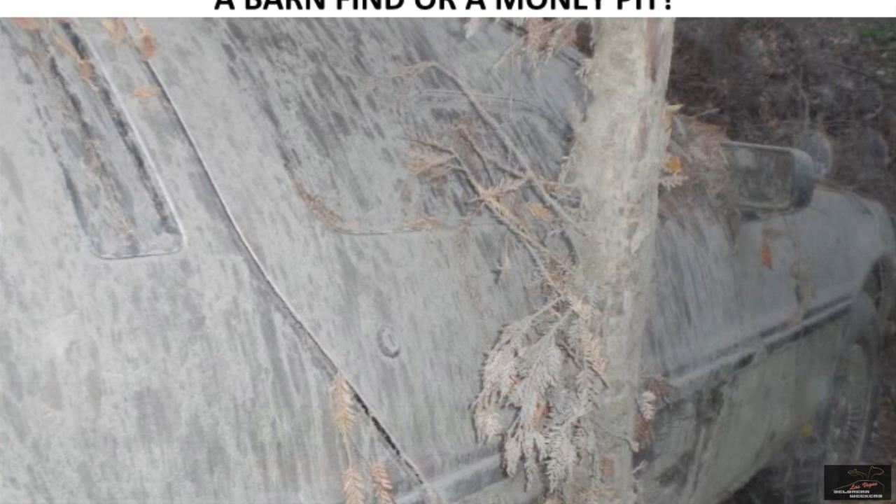So where did this start? Everybody dreams of a barn find, or what I call a money pit. This is a DeLorean that was out in the woods with a tree growing next to it, covered with a lot of dirt and dust and debris. I've restored 3 cars like this, and you learn a lot. They're a challenge, but as our Las Vegas DeLorean Wreckers people said, we're going to buy DeLoreans that no one would bother restoring and then make them into real cars again, and we've done that and made some very, very nice DeLoreans.

So, early on, when the cars first came out of the factory, what were the first things that failed? There was a number of items. There was an initial recall for loose bolts on the front sway bars. There was the alternators that failed. There was broken muffler brackets, loose trailing arm bolts, power window motors failed, and of course, the illustrious plastic clutch line failure. So what did this look like?

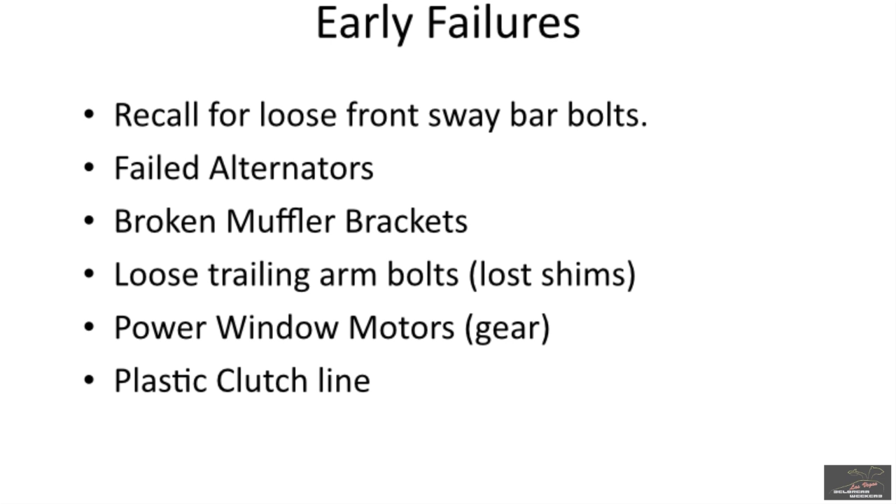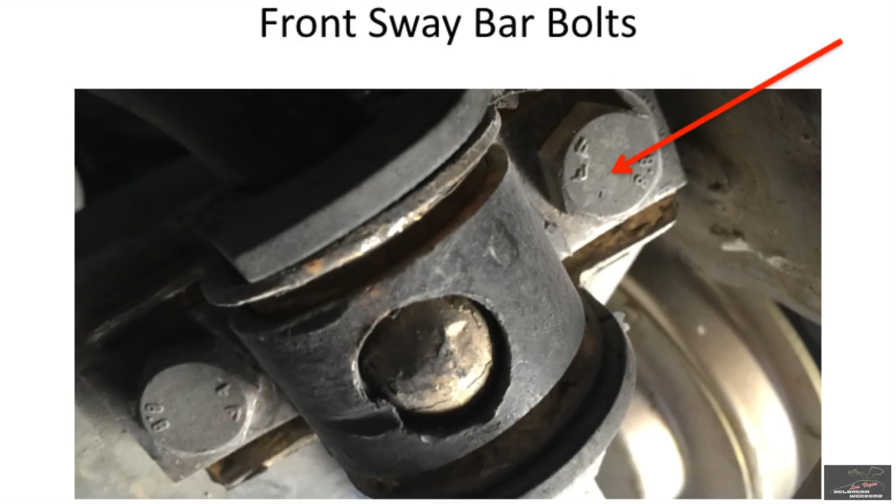This is a picture of the sway bar bolts. This car does not have the factory recall on it. The factory recall was simply a bunch of tabs that they put below this bolt and bent the tabs up so the bolt wouldn't come loose. So if you don't see tabs holding your bolt on, you probably didn't get the factory recall. Does it really make a lot of difference? No, just make sure your bolts are tight. And on every car I've tightened them up, I've never had them come loose again.

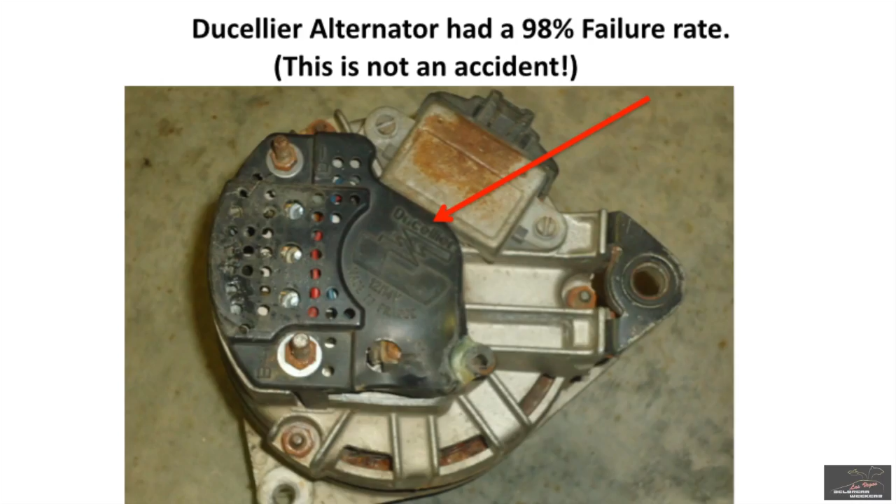This, of course, is the infamous Ducellier alternator that had a 98% failure rate. That's not an accident. Failure rates on alternators are less than 1 in 1,000, and on new ones they're close to less than 1 in a million. The fact that it had a 98% failure rate means they basically sold him junk. And of course, DeLorean did not pay for these. Here's another shot of the Ducellier alternators.

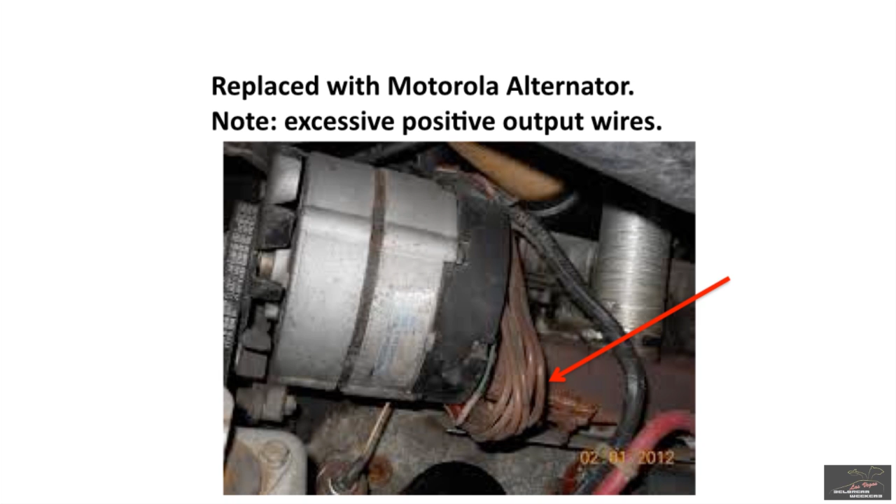So what did people do early on? At least from the factory, they started putting in Motorola alternators. But one of the things that bothered me about the design was these brown power wires from the alternators. This is unusual—why did DeLorean engineers run all these positive 12-volt wires to the different sections of the car? They just did this. It's sloppy, it's bad engineering, it's a waste of wiring. And the problem, and we'll talk about this later, this stuff starts to corrode. What I do on my cars is I basically replace this with a 6-gauge or 8-gauge wire to the fuse box, because the more wires you have, the more that's going to go wrong. So we got rid of that.

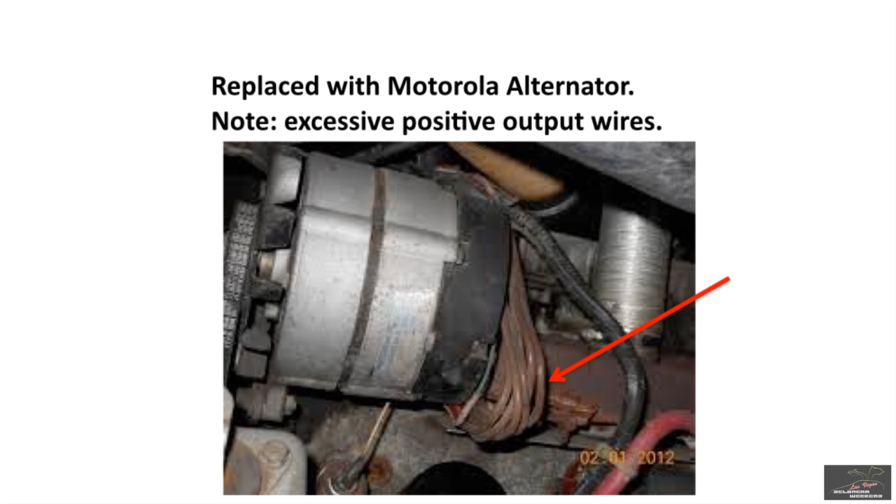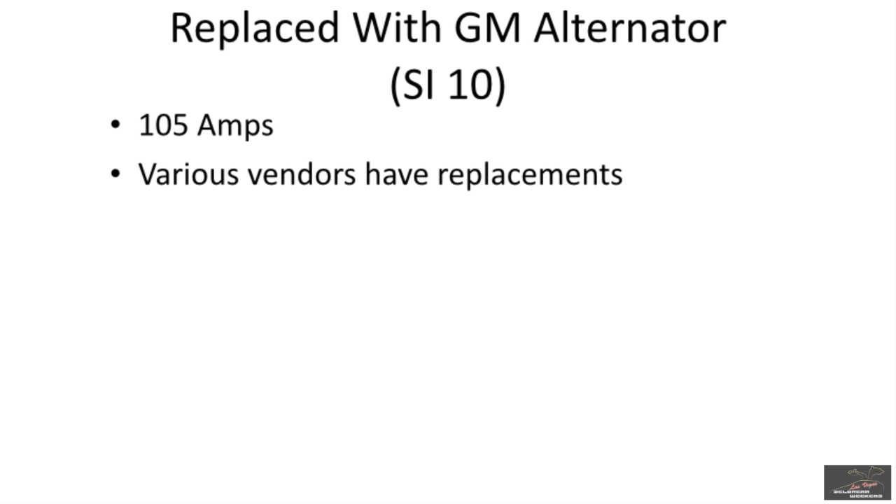What people typically do is they replace it with a 105 amp GM alternator today. It's an SI10 model rather than an SI12. So if you're going to do that, buy an alternator. You can get the really cheap ones on eBay, simply looking for an S10 or SI10, or you can go to the vendors and pay a little bit more. But in any case, just change the alternator. Most likely your car has had it replaced already. I think I have seen 1 car with an original Ducellier alternator on it.

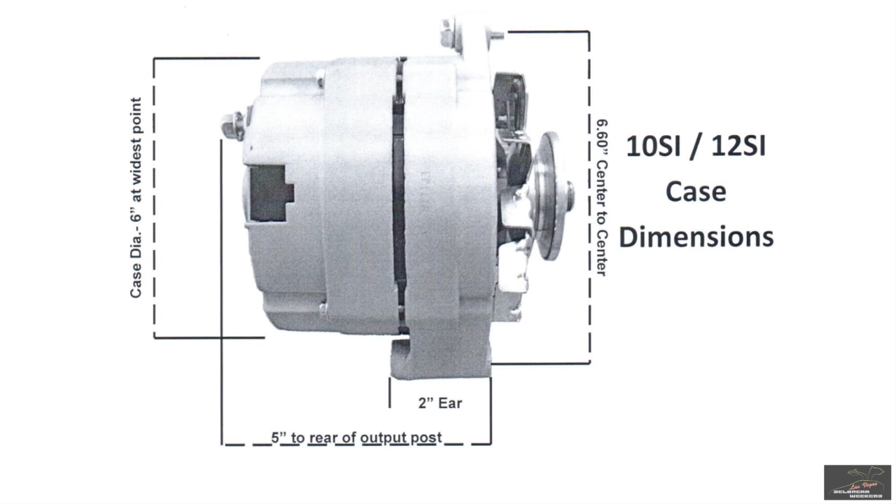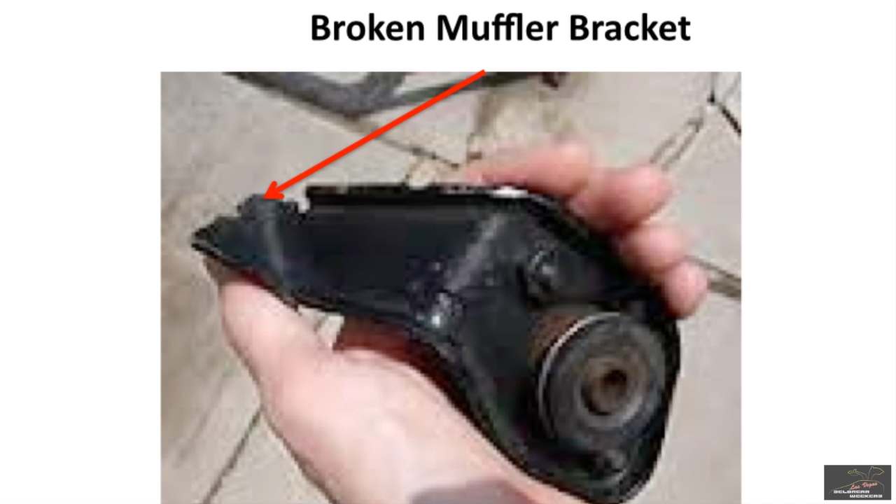And the next initial failure was the broken muffler brackets. They basically all cracked right at this particular point. It was a vibration issue, and if you re-welded them, they didn't break again. So that hints at a hardening problem when they were originally stamped, or there was stress put in from the original factory. But most of these have been fixed on everybody's cars. I haven't heard of a muffler bracket going bad again since the late 80s or early 90s. Here's another repair job on it.

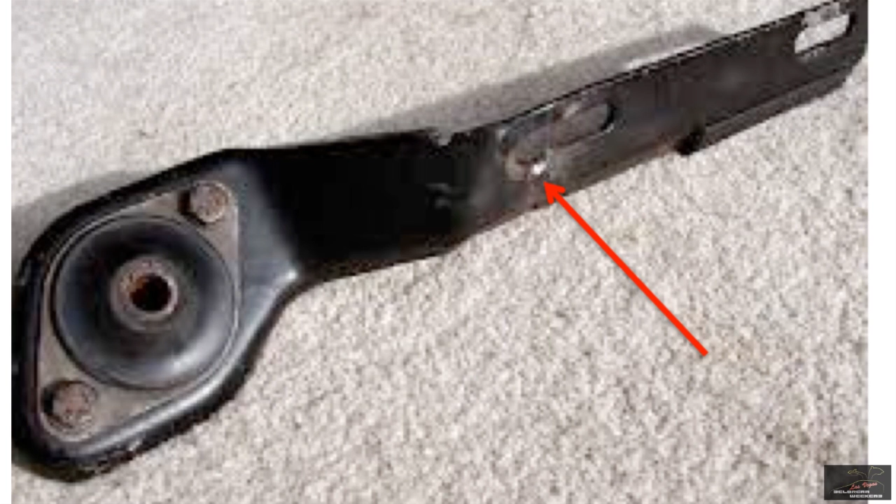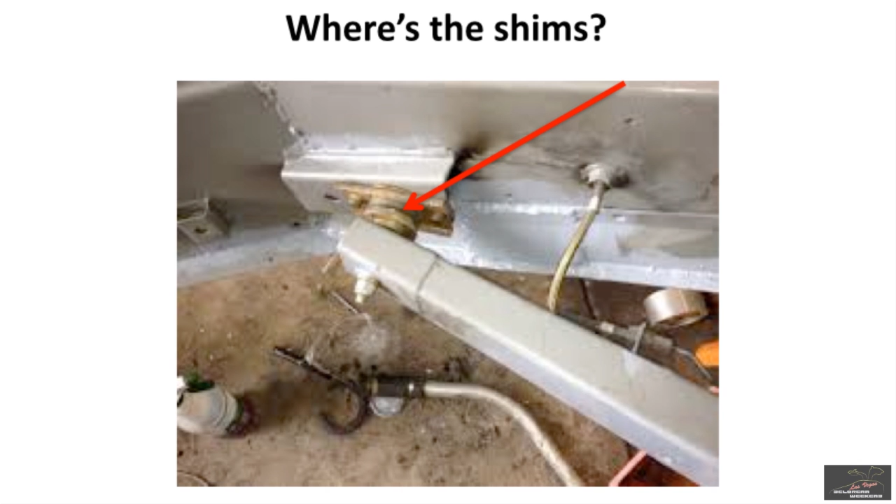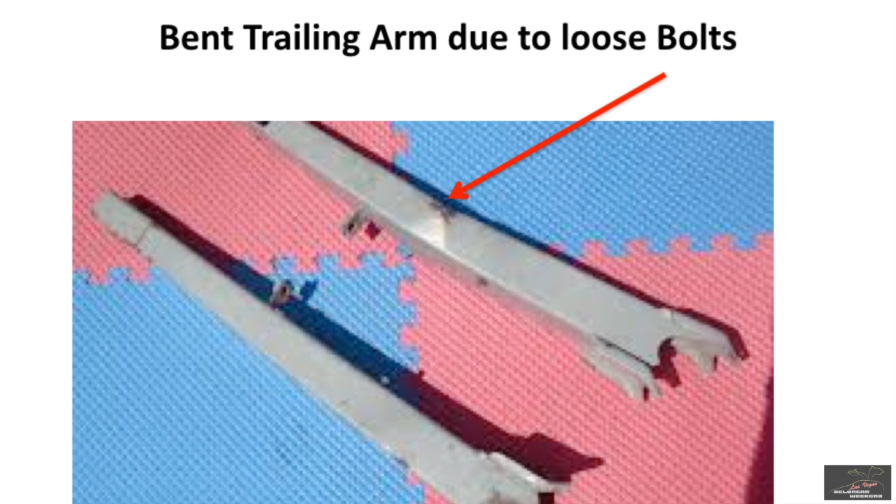If your trailing arm is bent like that, you have to replace it. So make sure your trailing arm bolts stay tight. Here's a typical trailing arm bolt. I said, oh, I'm going to fix my trailing arm. So you try to get your trailing arm bolt out and then go, it ain't coming out. Not without a big crowbar and a big hammer and lots of force. And this is what you'll find when you get them out. They actually bend quite easily.

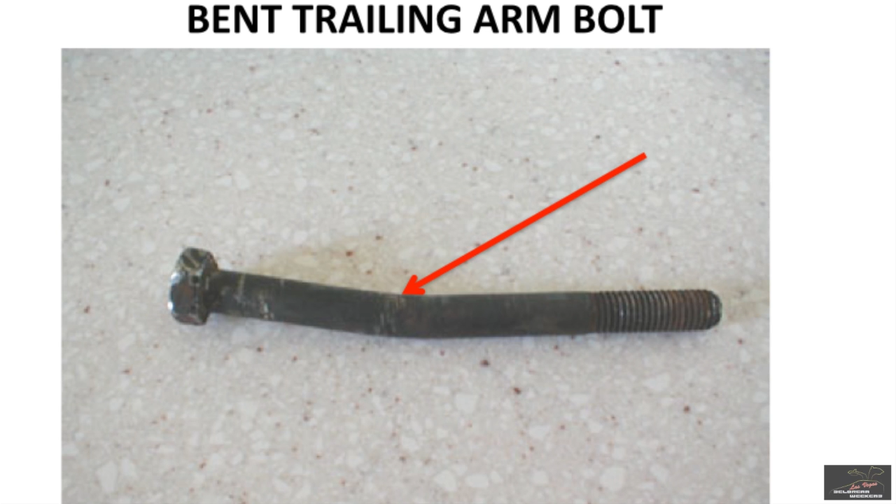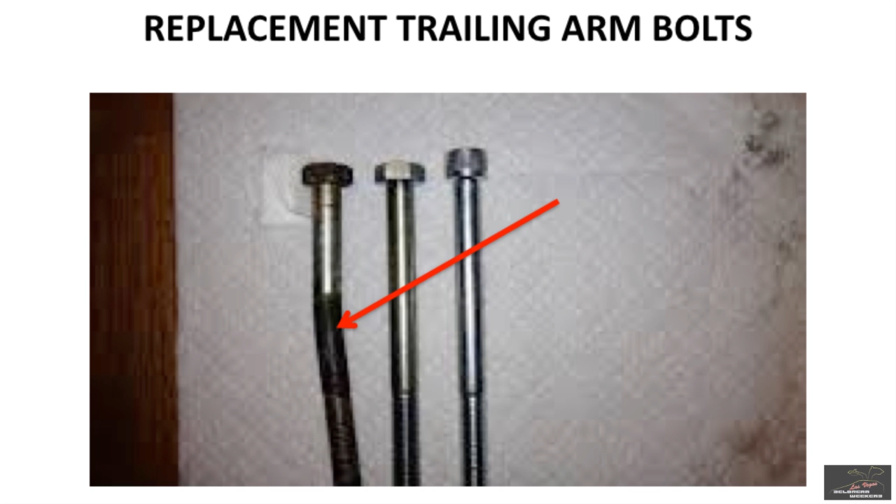Here's again another one. These are replacement trailing arm bolts that are hardened so they're less likely to bend. But if you're going to put in a high horsepower engine, you need to have trailing arm reinforcements put in, and there are a couple vendors who make that.

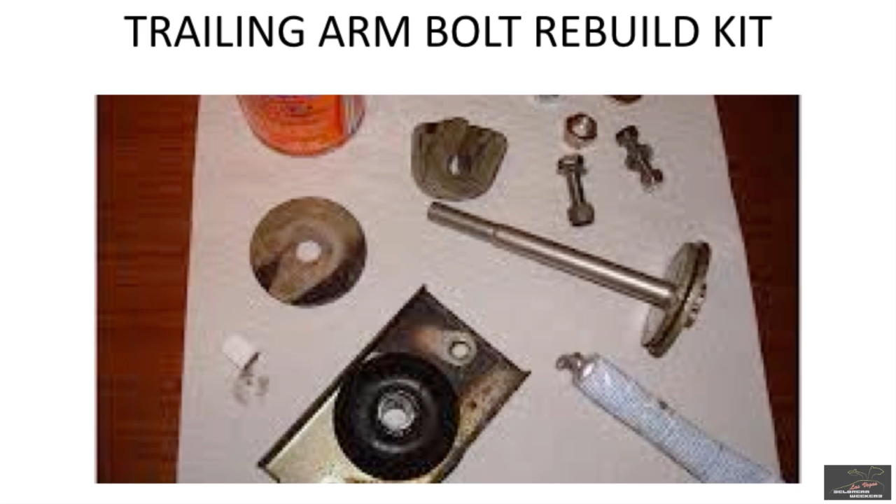This is a trailing arm rebuild kit. Problem I have with some of this stuff, these look like original 35-year-old parts. And these look like original 35-year-old parts. So 35-year-old rubber in a car may not be a good idea. Here's another kit where they give you the shims and the trailing arm bolts. So if you're going to deal with your trailing arm bolts, you may want to look at some newer parts. We'll show that a little bit later. But this is something you've got to really pay attention to.

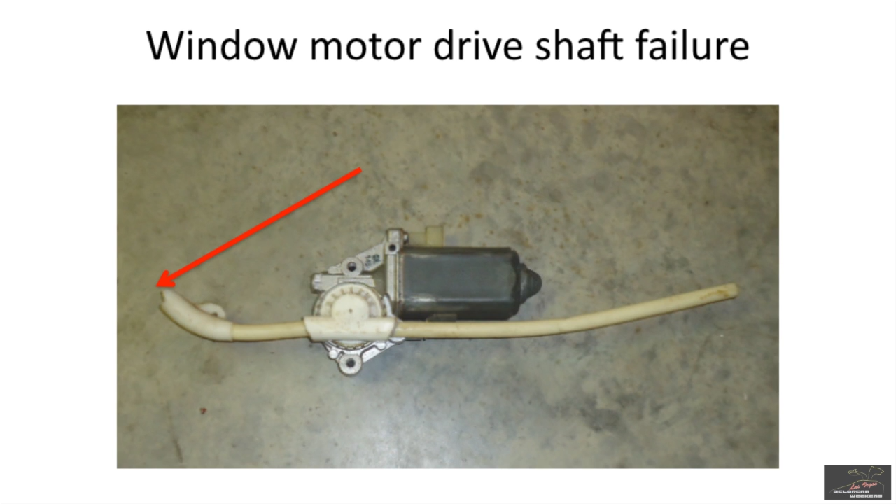And then another early failure was the window motor drive shaft failure. These were plastic and they would crack in this particular place. Mainly what happened is you would hit the end of travel on the window, causing stress in here because these designs did not have current limiters that would sense that the window was closed, and so this stuff would break. And then the other place it would bend is right in here.

And this is a close-up of it. See how skinny this groove is? And this is much larger, and what would happen, this would literally drive it out of the shaft and it would be flopping inside your door. So they came up with replacement ones.

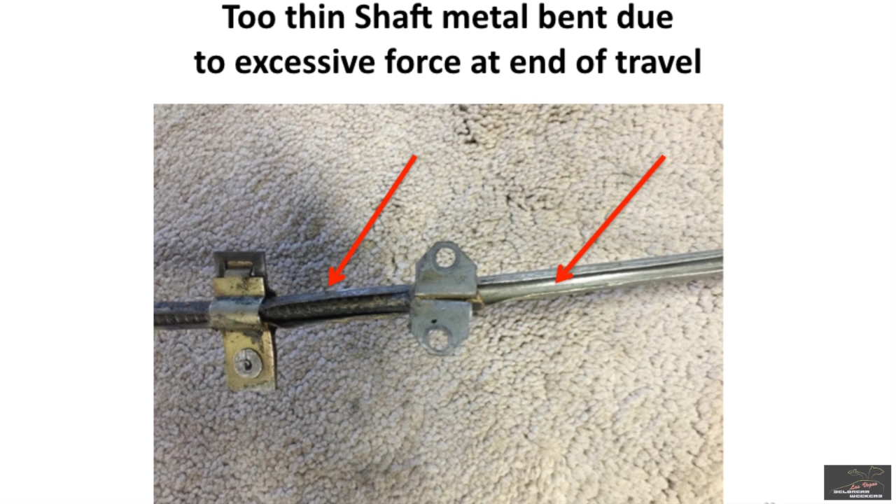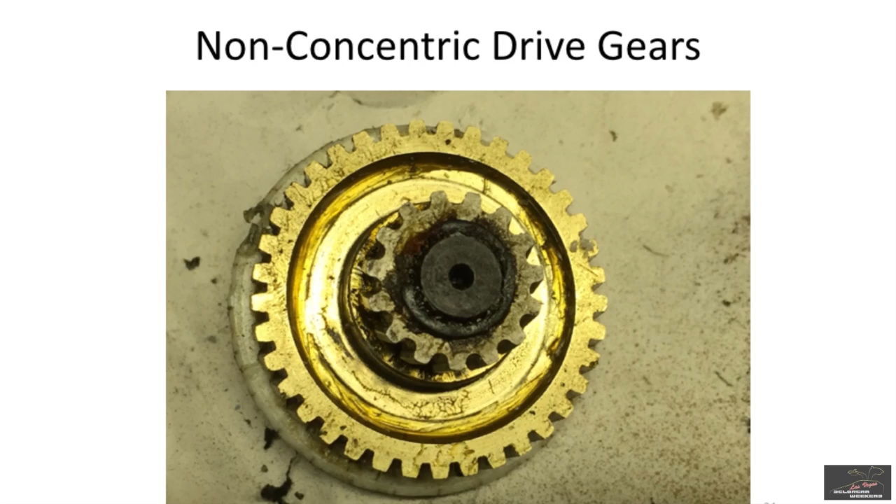The other thing that was wrong with these, this is where you get into the question of, did they sell them junk again? These are the non-concentric drive gears in window motors. And the motor would make a funny sound, and go, rrr, rrr, rrr. And the spacing on these gears was not even. How do you screw something like that up? But yeah, a lot of them were non-concentric drive gears.

They were defective. These are the aftermarket ones. They basically replaced the spring worm gear drive with a 3/8 inch diameter from a 5/16. And the big thing they did is this tube is much thicker metal now, so it can't actually be damaged by the motor driving the spring worm gear through it.

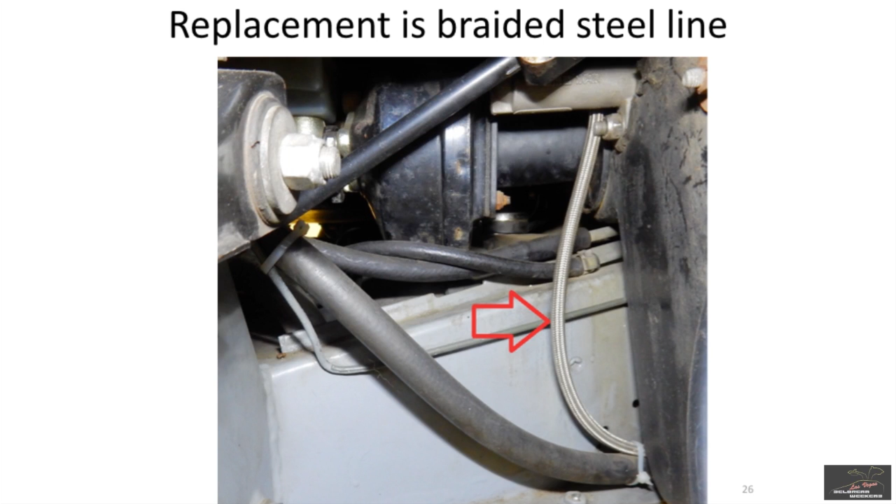And then of course the infamous plastic clutch hose. As soon as the car warmed up or on a hot day, this plastic tube would expand and you'd have no clutch pedal. And virtually all of them now have been replaced with a braided steel line. So if you see a braided steel line on your car, your plastic hose is long gone.

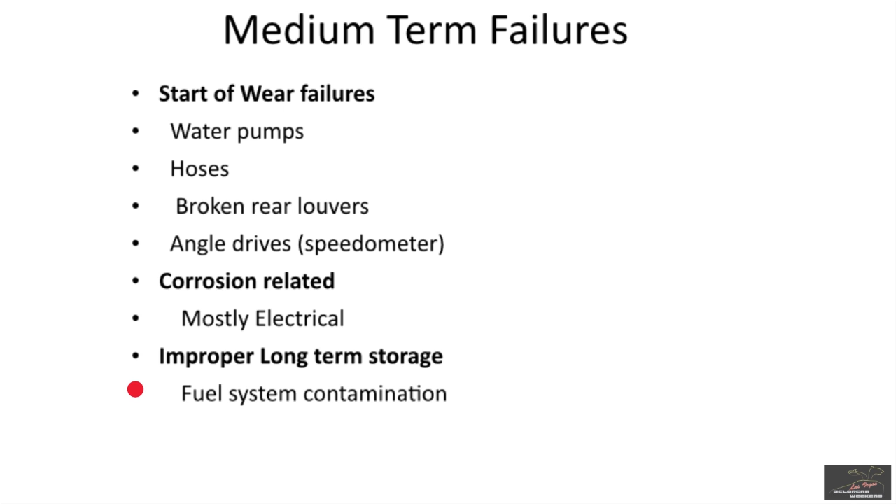And then we started getting medium-term failures. Water pumps would fail, hoses would come loose or crack, the rear louvers would break on them, the angle drives would fail and your speedometer would stop working, and then you started getting into the corrosion issues, and a lot of cars are experiencing problems with that right now. And then of course the people who don't drive their cars get into issues of fuel system contamination, and that's a very, very costly problem.

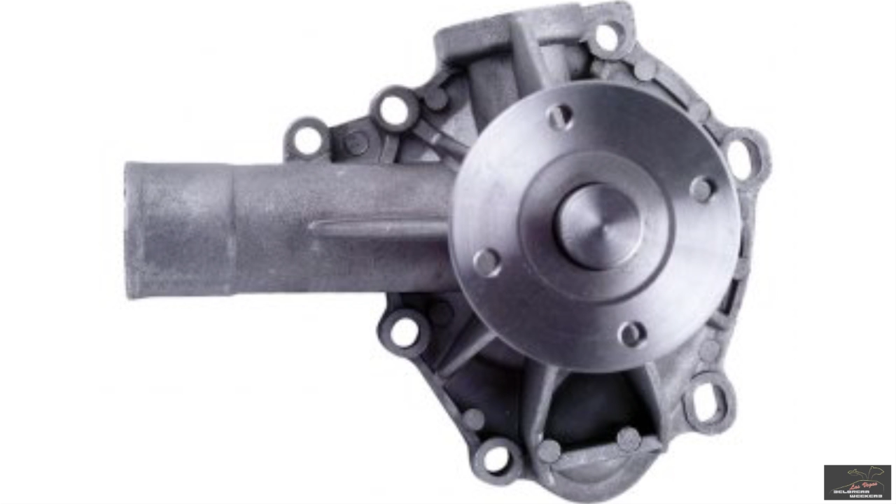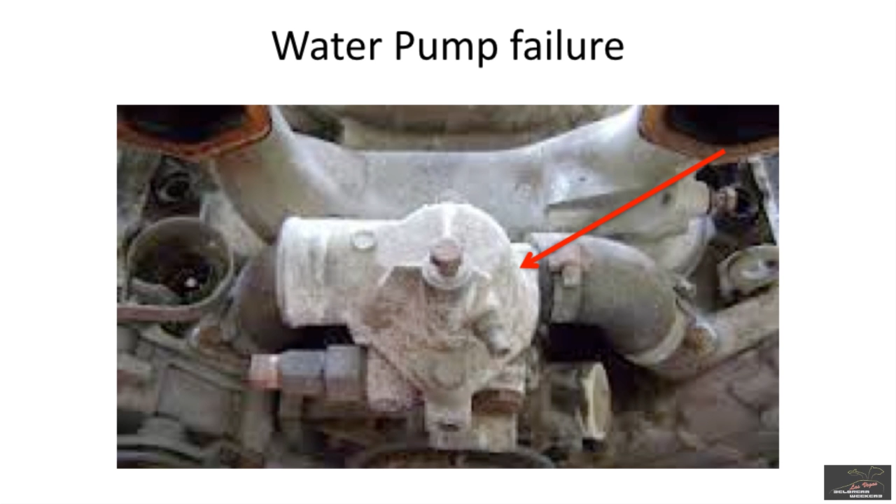The difference is that on the Volvos, the shaft is longer than on a DeLorean. But early on, this was the low-cost fix because you couldn't get DeLorean water pumps. Now you can, and most of the ones that failed have been replaced. They generally all failed around 30,000 miles, so the odds are your car probably has had its water pump replaced.

And then of course hoses, 35-year-old rubber. They now make them out of silicone rubber, which means they'll virtually last indefinitely. A silicone hose simply doesn't fail.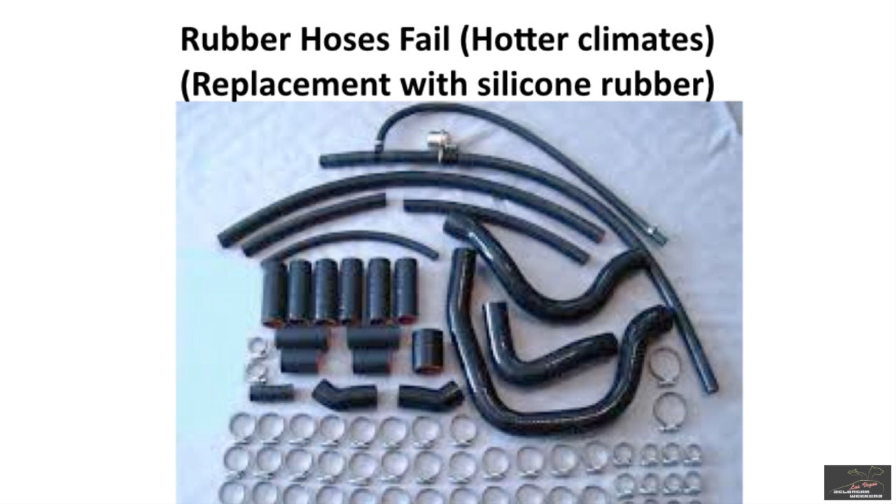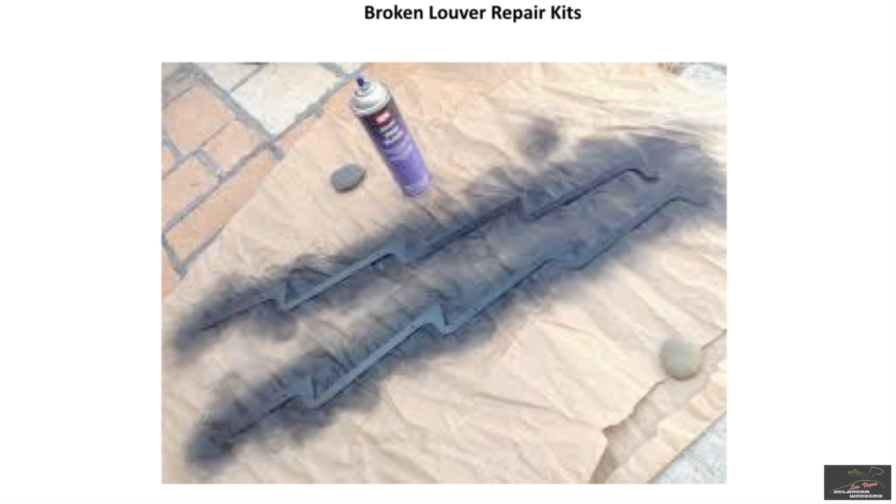And then of course the broken louvers. They sell repair kits that have bracing that goes down the center with little screws. You just bolt them on and it repairs the louvers. They made those a few years ago and they're still around, and they work. You actually end up with a better louver than came out of the factory, because it's not a question of if your louver is going to break, it's only a question of when, since they're all vibrating in the wind as you drive the car.

And then of course your angle drives, not a good design concept. These things have a lot of stress on them. John Hervey has come up with supposedly a better design that can handle more stress, but these things still break.

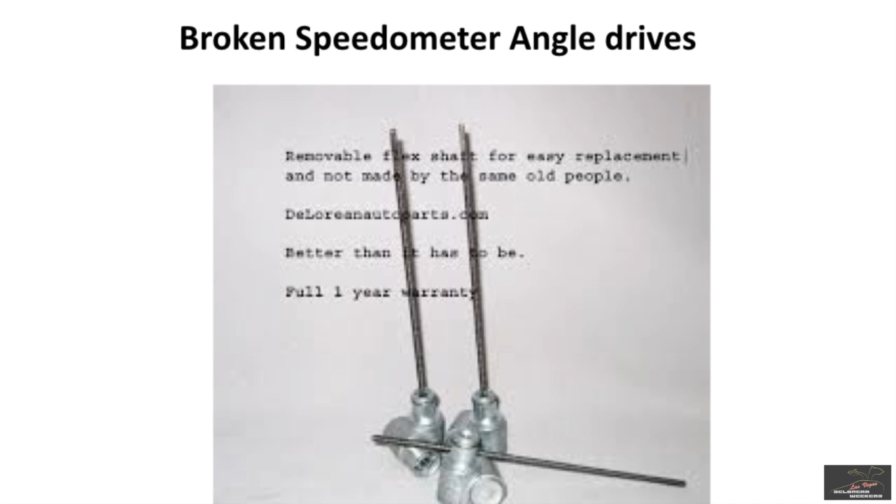They're driven literally by a nylon plastic disc on the outside of your wheel bearing on the driver's front tire, and that nylon disc starts to slip inside because the cables aren't greased. Then one of these usually snaps and you have no speedometer. If you don't figure out where your friction point is, you'll replace this and it'll fail again. Usually the failure point is in the speedometer cable that screws onto the end of this and goes up to your speedometer. The inside was never lubricated properly, the cable wore through, and now it's actually grinding on the inside, causing friction here, and then these things fail. So if you have one of these go bad, check the cable going to your speedometer, because it's probably going to need lubricating.

The earliest major corrosion problem was related to these door lock solenoids, in some respects ancient technology. This is a big wire-wound magnet in here that would pull the shaft in or stick it out to unlock and lock your doors. These things weighed three or four pounds each, and at the bottom of your door they put all kinds of stress on your torsion bars. So in the Midwest or areas with condensation, water would get in here and it would rust. People would get into their cars, lock the doors, drive, and then try to get out and it wouldn't unlock. If you have these in your cars, get rid of them. They're junk and they put a lot of stress on your torsion bars.

People go, oh, my struts need replacing, and I go, no they don't. Take this out of your door and it'll be just fine.

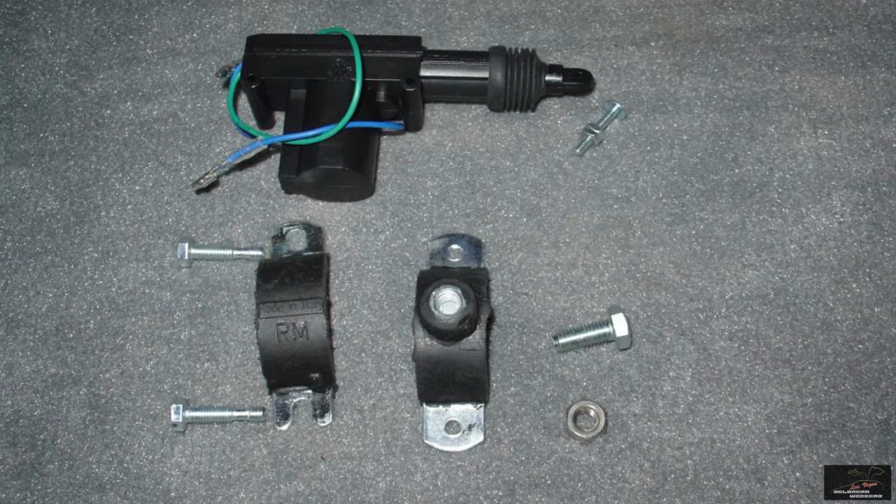Because you don't want to completely lose the power locks feature, you can replace these old heavy door lock solenoids with door lock actuators. These serve the same function of locking and unlocking the doors, but are built with newer, modern technology. They use less power, weigh a lot less, and bolt essentially into the same holes. You can get these door lock actuators from a number of DeLorean part vendors.

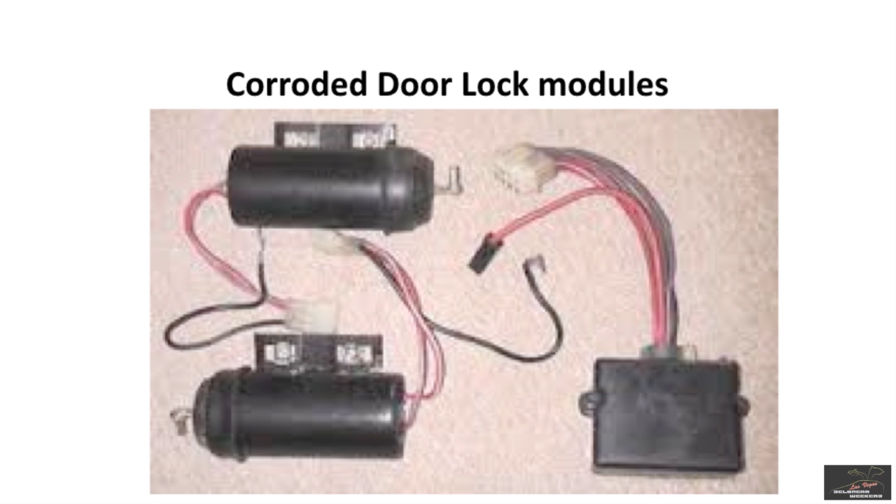The other big problem with the door locks is the door lock control module. The old module from the factory leaked current all the time and was responsible for a lot of dead batteries. You can now get a replacement digital door lock module, made with modern circuitry, that does not have this current leakage problem. They are designed to plug right into the standard DeLorean wiring harness.

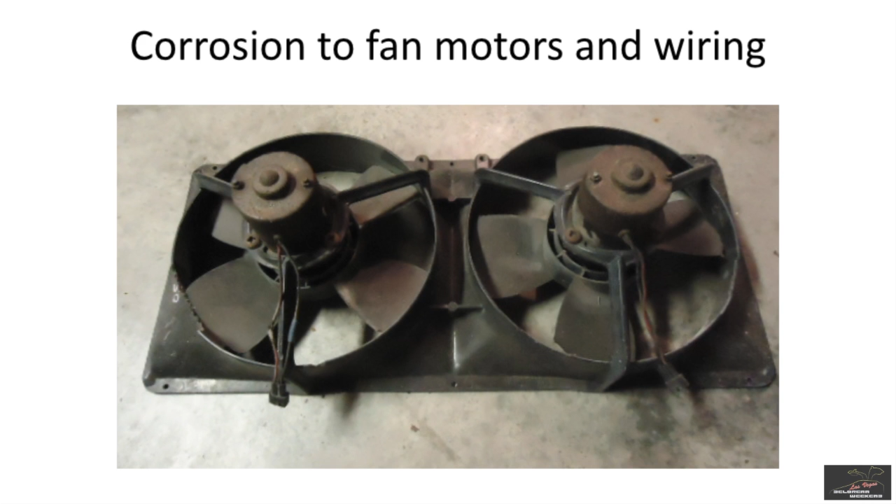Cooling fans - a couple things happen here. Of course you get corrosion and condensation and the bearings dry out, and when that starts to happen, it starts pulling more amps. At the same time, these connectors here would get wet and corrode, causing an additional set of amps going in here. So these things started drawing way too many amps, and a lot of times the motor would stop working.

Another corrosion problem had to do with corroded alternator terminals. We showed earlier all those extra wires at the end. Well, here's what happens: each one corrodes against the other, and now you have all this resistance coming out of your alternator.

When you have lower voltage coming out of the alternator going to all your circuits, that lower voltage has to be replaced by more amps, and that generates more heat, and more heat means more corrosion.

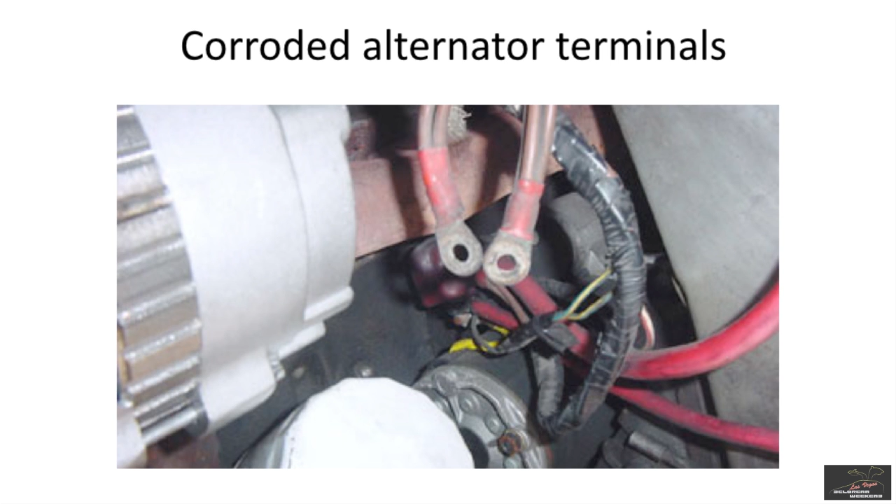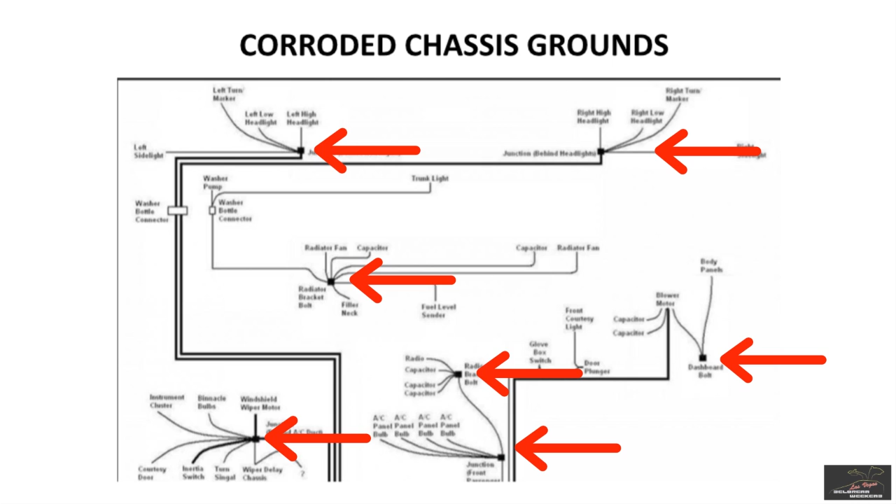What people recommend is that every year you take every one of these loose, clean them, and re-bolt them to your chassis. So when I fix this, I run additional grounding wires, screw grounding stuff to the chassis, run new grounding wires, and then the problems go away.

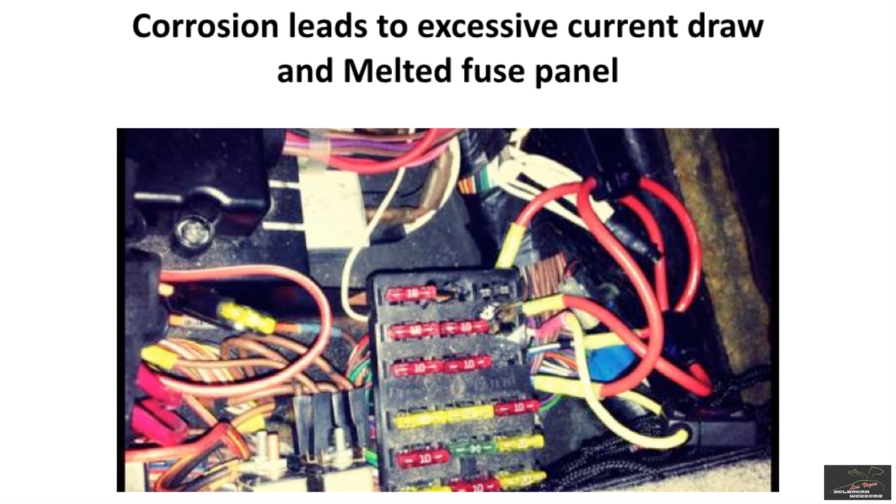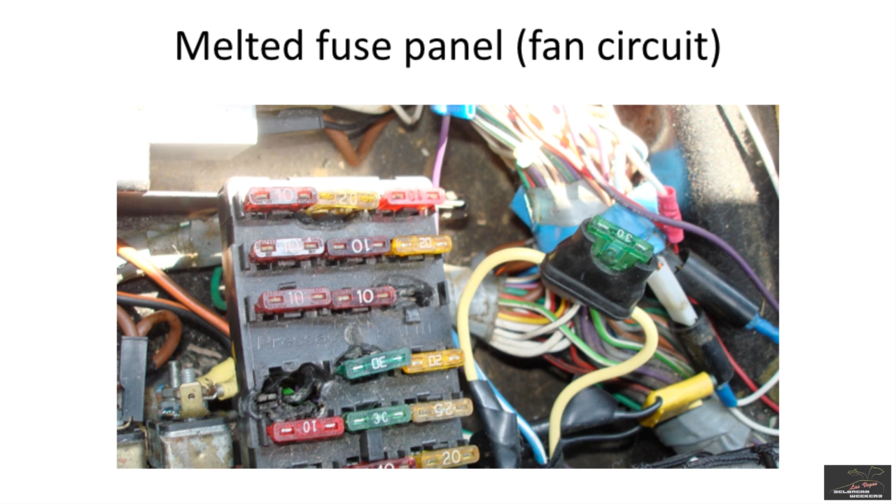So what happens when you start drawing additional amps? You start melting your fuse boxes. I think this might be a fan failure where it just melted the hell out of that. Here's another fuse box, I think this was for the blower motor for the air conditioning. That's history. Corrosion and electrical things cause real problems in the cars, and you've got to deal with that.

The other thing that corroded was the tail light assemblies. These were solder plated over an early printed circuit board, totally open to atmosphere. The sockets for the bulbs were steel.

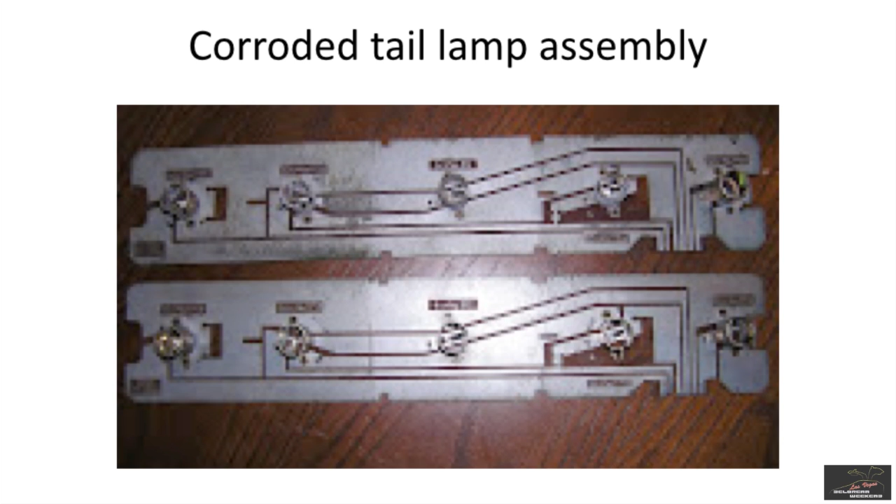So if you don't want to spend the money to replace the circuit board, this is a new circuit board, what you can do is resolder the joints where the socket connects to the printed circuit board. This is where they corrode and stop working. You can resolder these, clean this stuff up, and make them work.

Here's the other part that goes bad: this is the plug onto the board. These things get dirty and corrode, and you lose connection and your tail lights stop working. Clean all that stuff with sandpaper, then put grease on them to stop corrosion, and put them together.

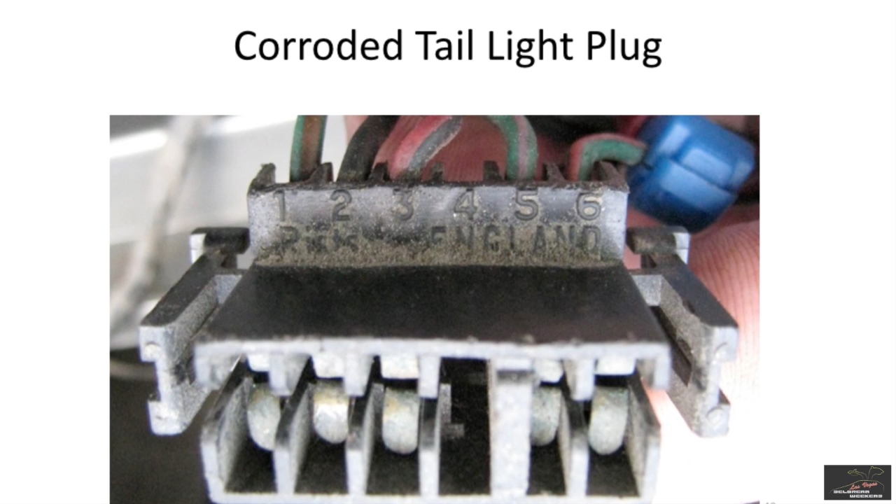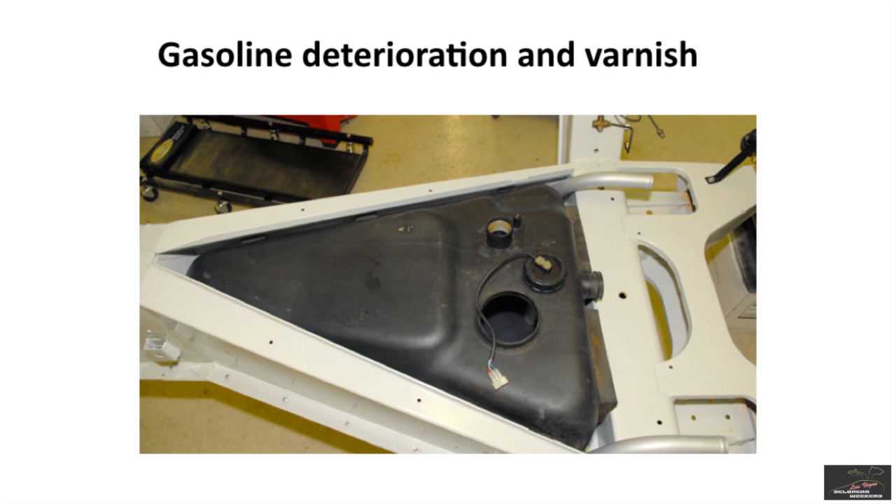The gas tank: if your car has been sitting idle or stored for a year or more, you need to clean out your gas tank. There's a little opening in it that you can stick your hand into. Just get in there with alcohol and keep cleaning and cleaning, and eventually you get it clean.

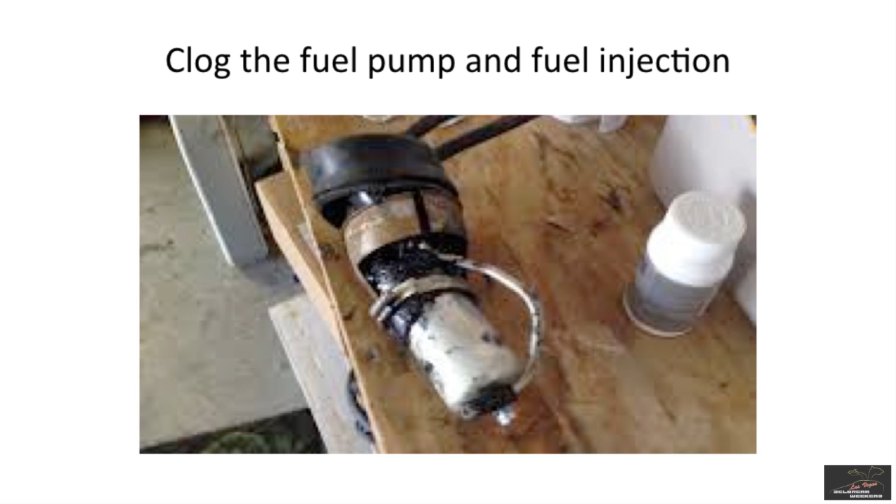They all get damaged from gasoline evaporating in the car. Considering all the components here, you can understand why it's a big job to fix this once it has happened.

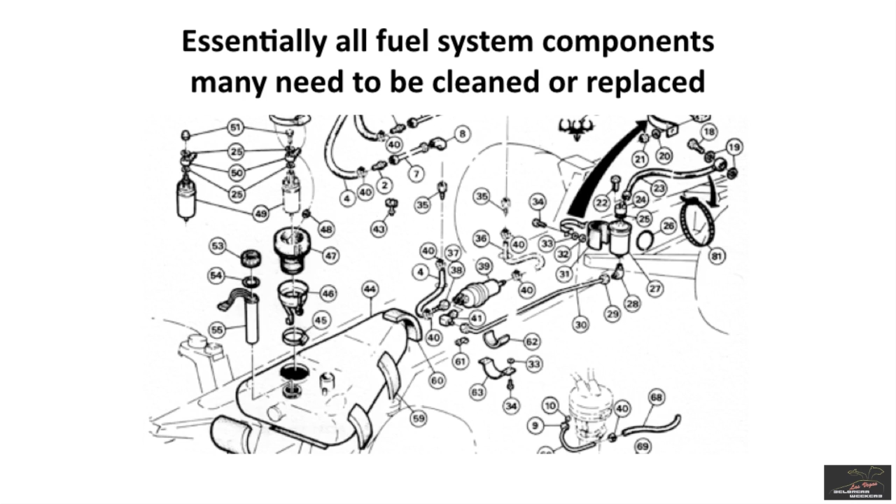The other thing about cars stored outside, particularly in areas where it rains, is water would get into the intake manifold, and particularly your spark plugs are down in holes. Water would get in there and corrode the aluminum in the valley of death, and once you corrode that intake manifold, it's mostly junk. You can try and fix it, but a number of cars were stored or left outside, water got into the valley of death, and that was the end of the intake manifold.

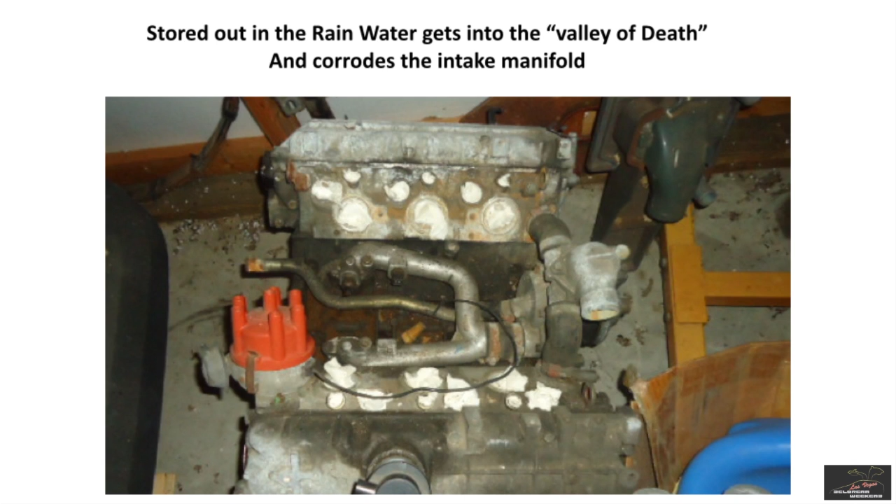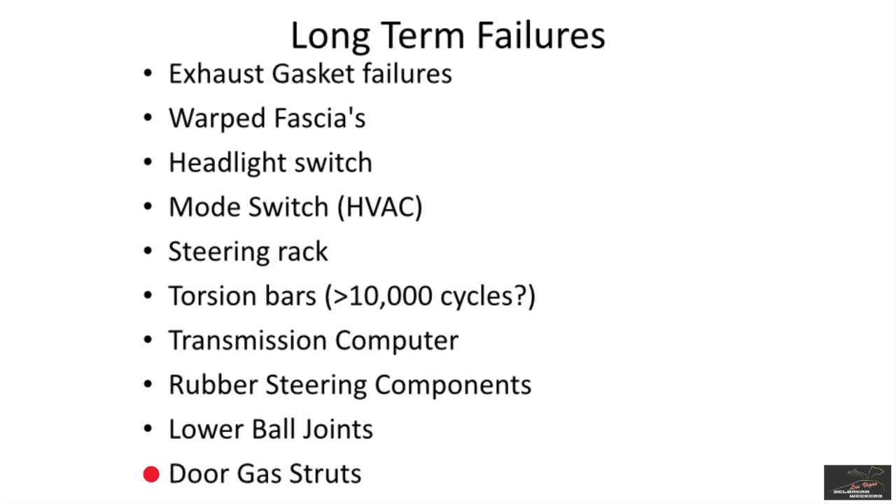Okay, so now we're dealing with long-term failures: exhaust gaskets, warped fascias, headlight switches, mode switches, steering racks, torsion bars, transmission computers, rubber steering components, lower ball joints, door gas struts. Once you get past that 30 to 50,000 mile mark, a lot of this stuff starts to go.

This is your exhaust manifolds, and the gaskets failed here. You can see the darkening around the ports where the gaskets had failed.

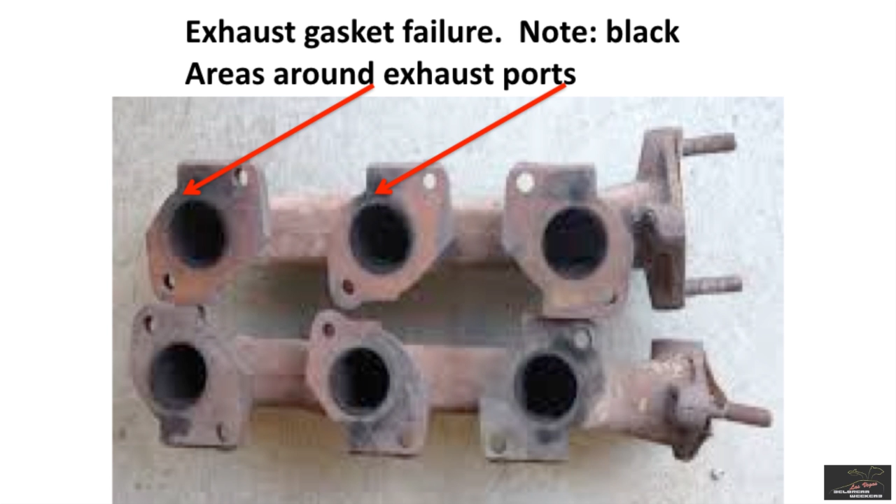What typically happens is you need new exhaust gaskets, and then, oops, broke a bolt, broke another one. They were steel studs in the aluminum block, exposed to 500-degree heat. They rust, corrode, turn into a little tiny piece of metal, and snap when you take them loose. So if you're going to go through this exercise, most people recommend replacing the exhaust manifold studs with stainless steel studs, and that should basically cure the corrosion problem.

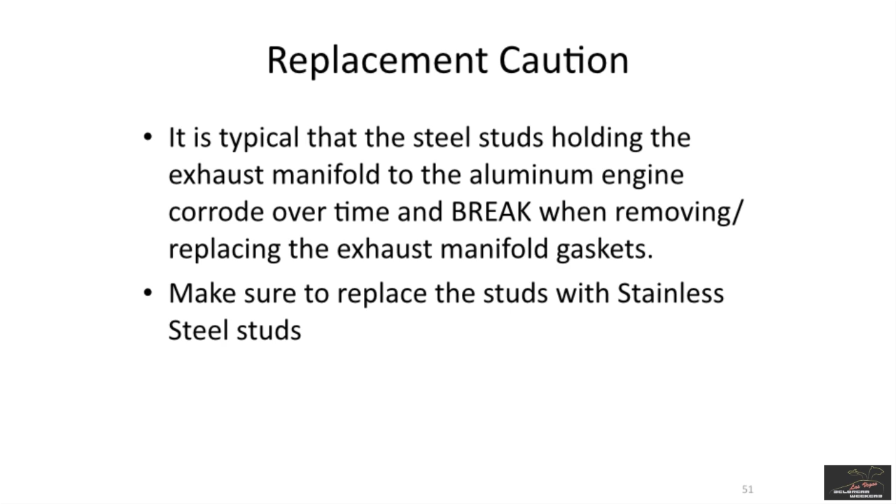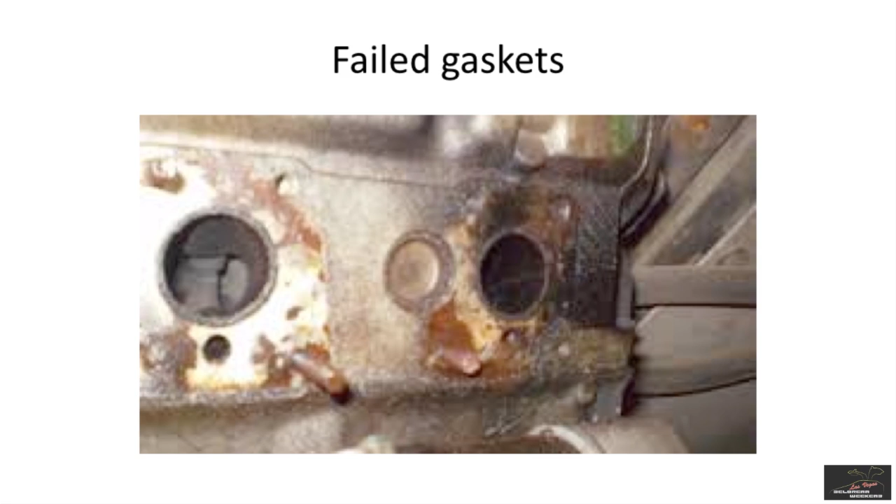Here's another picture of failed gaskets, what they look like. Why did they fail? It's an aluminum block with a cast iron manifold - not probably the greatest choice of gasketing materials, because this problem has been recognized since the 60s. If you put in a high quality Felpro gasket that has different metal and other fibrous materials, you don't have this problem.

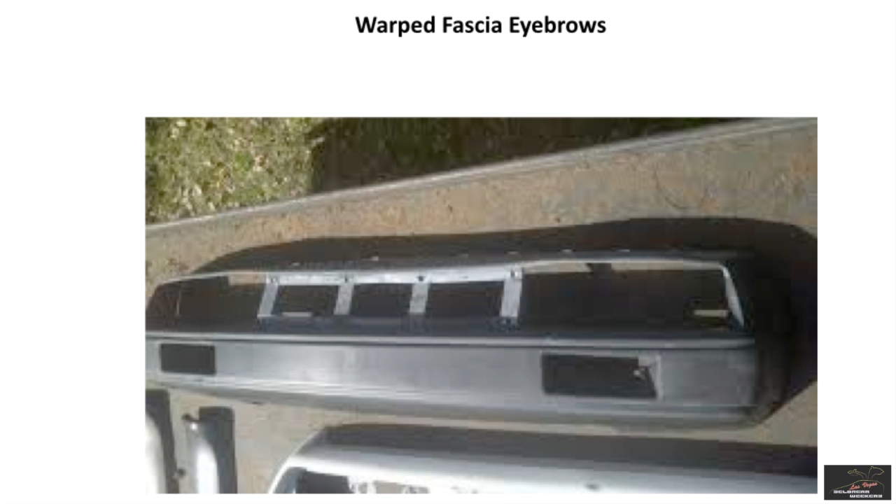But I don't think DeLorean got the best gasket materials when he put this stuff together. And of course, warped fascias have been an issue, and we came up with the fix for this back in the mid-90s and published an article in DeLorean World magazine of how to fix this.

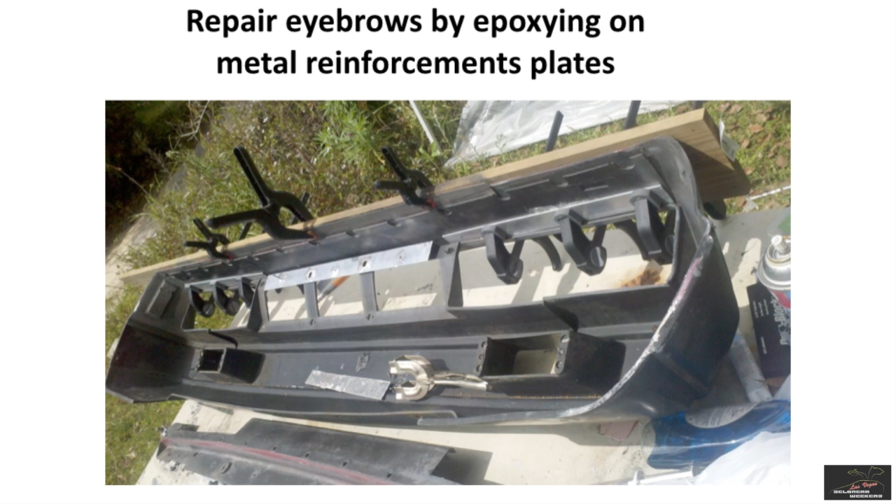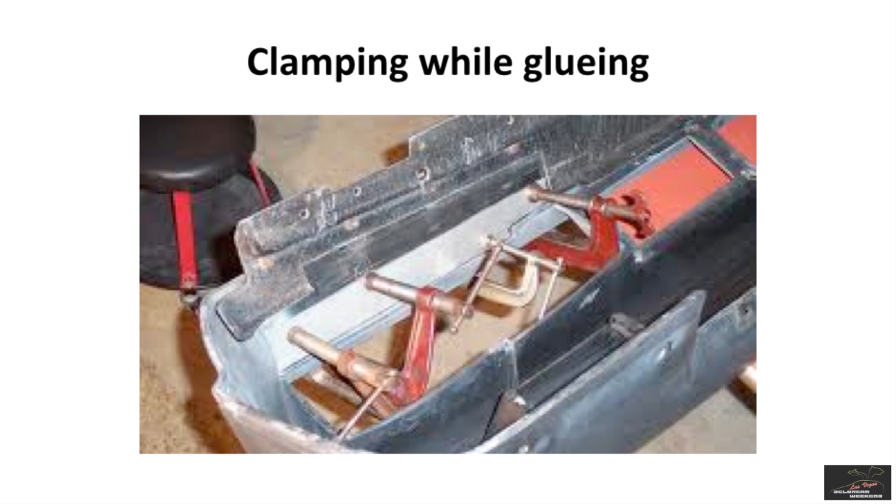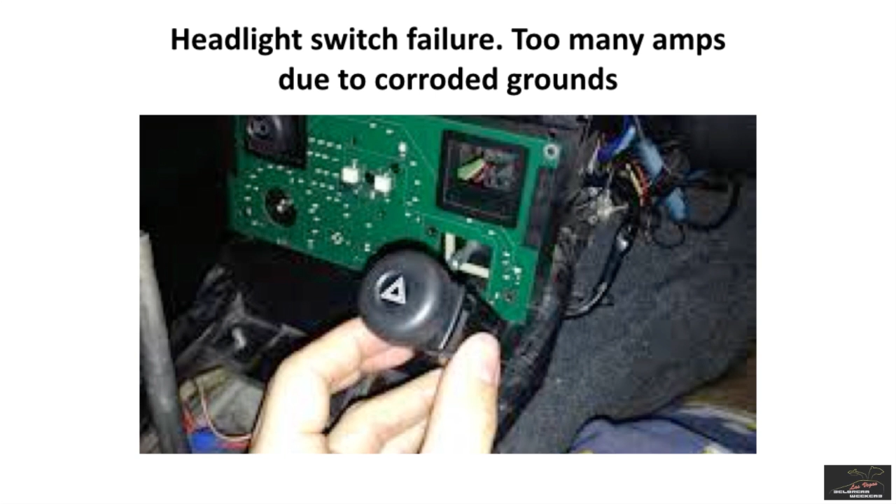Headlight switches have been a problem of failure. I'm not convinced that the switch is the problem. I think corrosion in the headlight system and emergency flasher system is what causes these switches to fail. So if your switch has failed, don't just replace the switch - go clean up your headlight contacts and your emergency flasher contacts and then replace the switch. Because if you just put a different switch in there, it'll probably just fail again.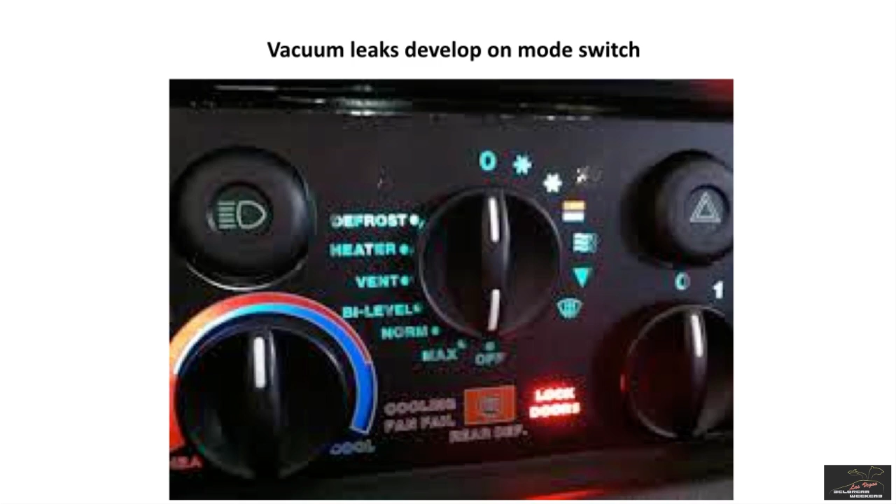Then the mode switches - these drive vacuum motors, so there's vacuum that goes to this, and what typically happens is the O-rings wear out and you hear a hissing sound. As far as I know, these have not been repro'd yet. There are people who have successfully rebuilt them - it's not an easy job. There is a rebuild kit for these switches available from DeLorean Motor Company.

Rack and pinion steering - DeLoreans do not have power rack and pinion, it's manual rack and pinion. Generally they work pretty well and don't wear out a lot, but they can. The main problem is a lack of lubrication in the main steering box. A lot of the DeLorean dealers sell replacement parts. It's not a real difficult replacement if you've played with steering stuff before, but be aware that this eventually does wear out and need replacement.

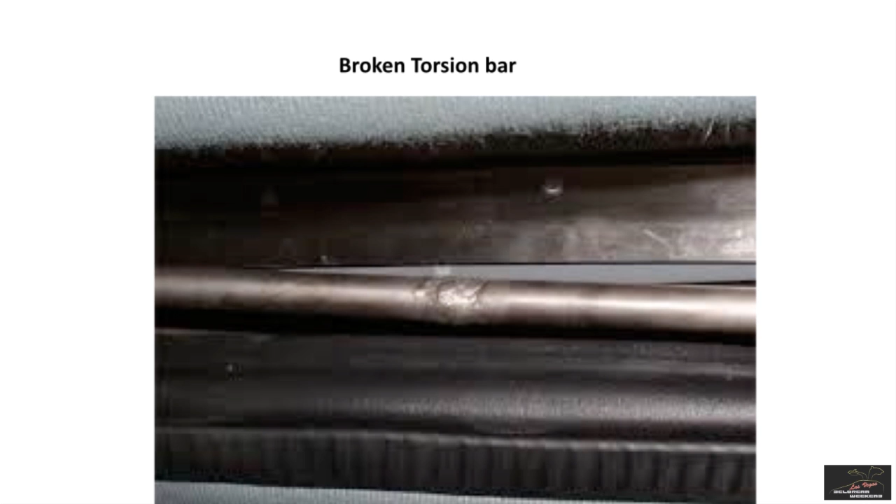Broken torsion bars - there are a number of instances of these. You can pay $750 or more for a replacement bar from a wrecked car, but really smart metallurgists figured out a modern way to produce a torsion bar that has essentially the same characteristics of the factory ones. The factory ones were produced with a cryogenic hardening process that was relatively new in the 80s. It presented steel with some unusual properties, able to twist and not fall apart. Very expensive to do it that way.

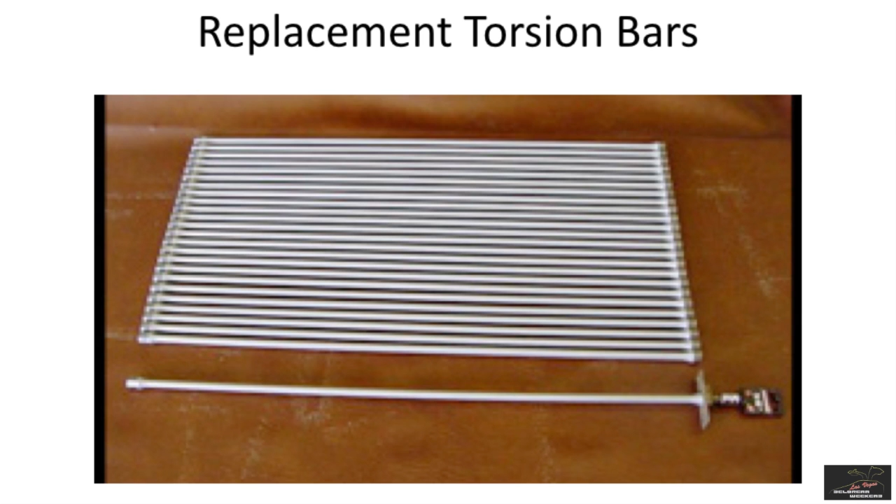The gullwing doors are very cool, but you don't do cryogenic hardening anymore - it's just a matter of the alloy steel, and here's a whole run of torsion bars. Once these came out, the price dropped considerably for replacement ones.

The famous automatic transmission computers, these of course do eventually fail. They're a rather unsophisticated computer - in this particular case, using the word computer is probably not technically accurate. This is basically a resistor network that changes resistance based upon the throttle position. If you were really good with electronics, you could replace this with an Arduino chip and a few solenoids. The fix in this is a resistor that goes bad. They take them apart, they replace the resistor, and then they sell them for $400.

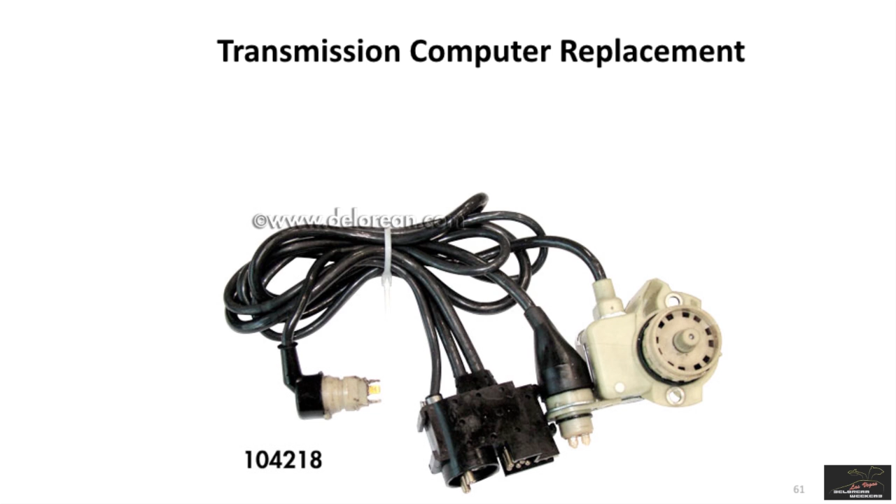How to fix these is still on the internet. So if your automatic transmission is doing weird things like only driving in second and third or only going into first and second, it's this thing that has gone bad and you need to fix it or replace it.

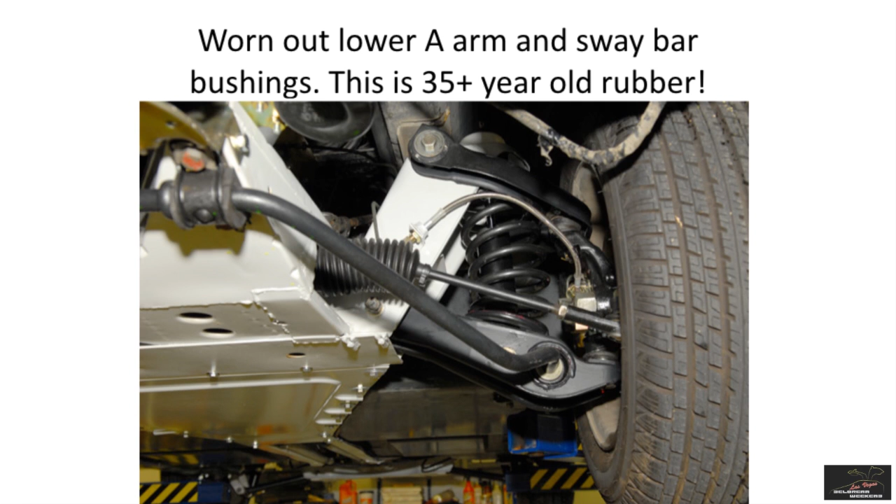Worn out A-arm and sway bar bushings - if your car is 35 years old and this has not been replaced, they need to be replaced. The DeLorean front end design, which actually came from Lotus, you can't blame him, depended upon the front sway bar to stabilize the lower A-arm. The lower A-arm in these cars are not triangulated - triangulated reinforcement was dependent upon the sway bar. An interesting cost-saving idea, but when the rubber goes bad, that front lower A-arm starts flapping in the wind and you get strange things in your steering.

If your bushings have not been replaced, it's a good idea to replace them.

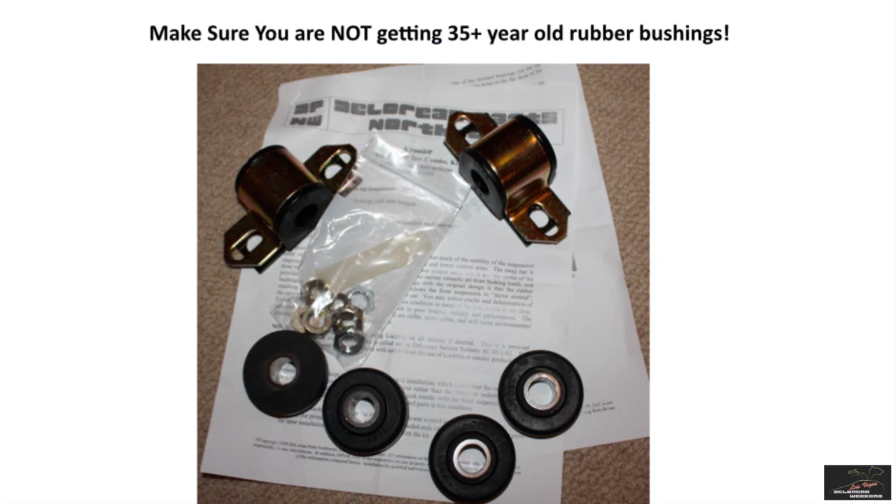Not a very time-consuming task, or even a hard task. It's take it all apart, put new bushings on, and put it all back together. But be aware your car probably needs to have this done. This is a kit from one of the vendors, from Toby at DeLorean Parts Northwest. These are new rubber components, but I know the 35-year-old stuff's still out there. I'd be very careful where you source these from if you're going to replace them, because you don't want 35-year-old rubber.

Okay, so we're going to talk a little bit about lower ball joint failure. It is becoming an issue. I'm hearing more stories about this, and I am concerned that this is actually defective parts, not just wear and tear or people not lubricating their cars.

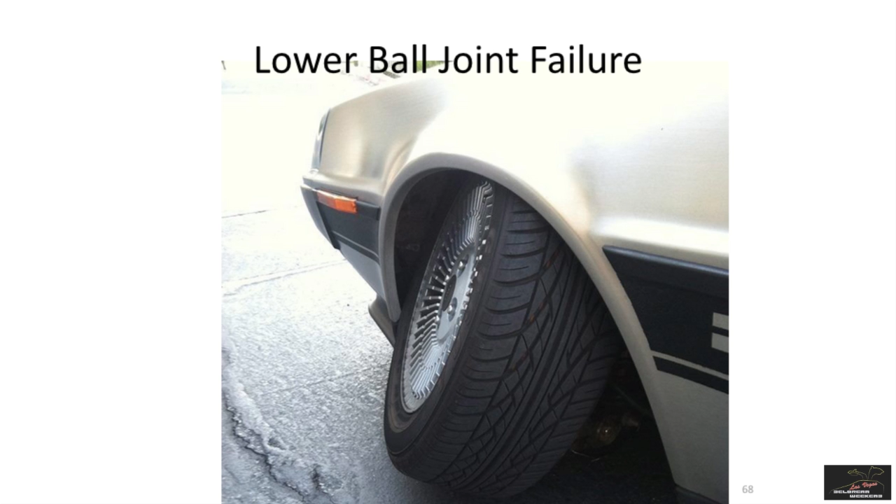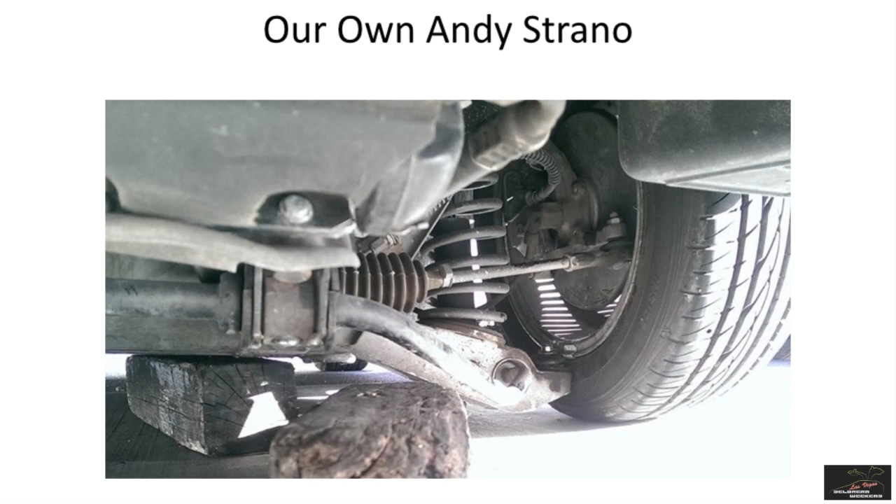This is pictures of Andy's car. He's got it propped up on a block here, and here's his lower A-arm hanging down, and the ball joint broke right into this area. This is the part that broke, this is the steel shaft. This is a new part. This should never fail at this point.

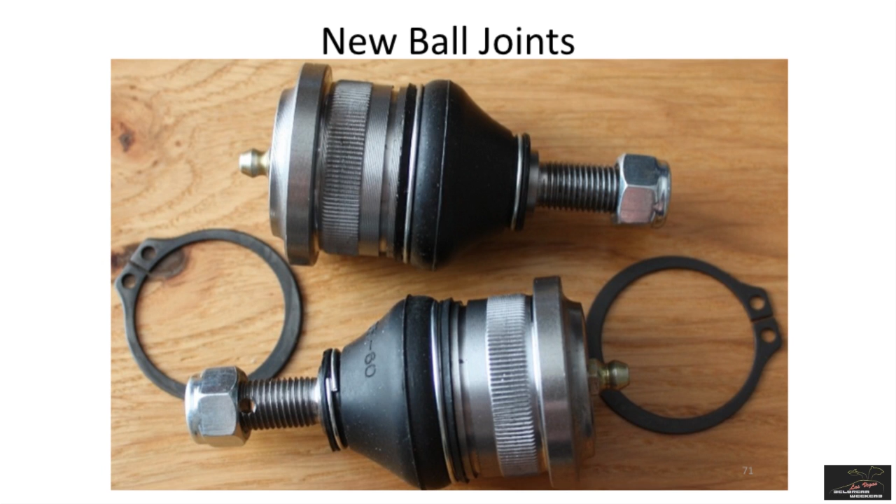This is a set of new ball joints from a company in England for DeLorean, and you notice that these are self-locking nuts. These are not keyed nuts, so they know something in terms of putting this together. Why did they change this from a keyed nut to a self-locking nut? And they have retaining rings too, which is also kind of interesting.

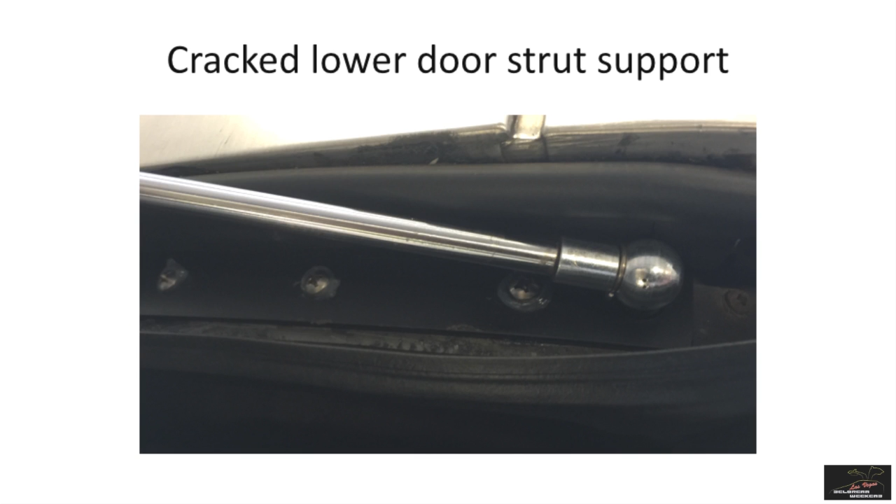This is a door strut, and the lower part in the back, this is all fiberglass with steel glued to it. After you've opened and closed your doors way too many times, this starts to break. They now sell braces that bolt on here. It's actually a much better design than the original factory one. Not a big fix, but it is happening on more and more cars. So if yours starts to crack, don't get panicky. It's just a new part you have to put on.

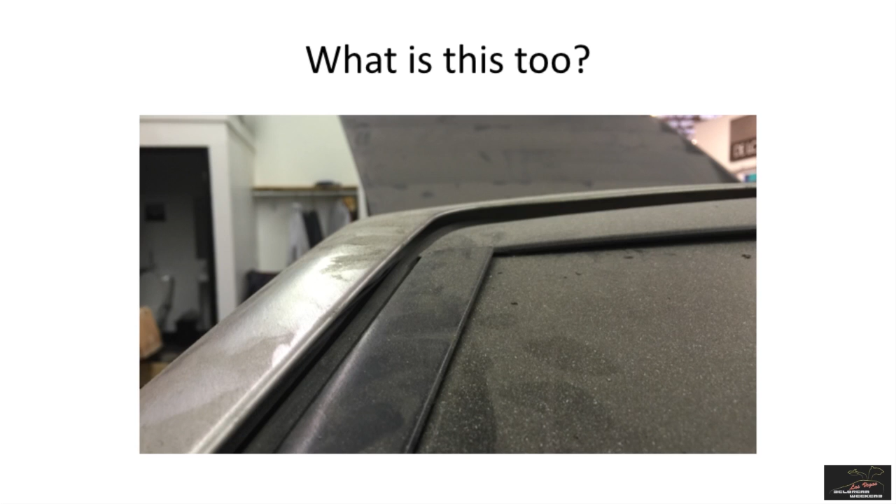This is a fun one. Some people, instead of replacing the door struts, crank the torsion bar. And you keep doing that and doing that, you actually bend the door. You've got to replace the struts and make sure you use good ones. Do not increase the torque on your torsion bars, because you'll end up with a taco door.

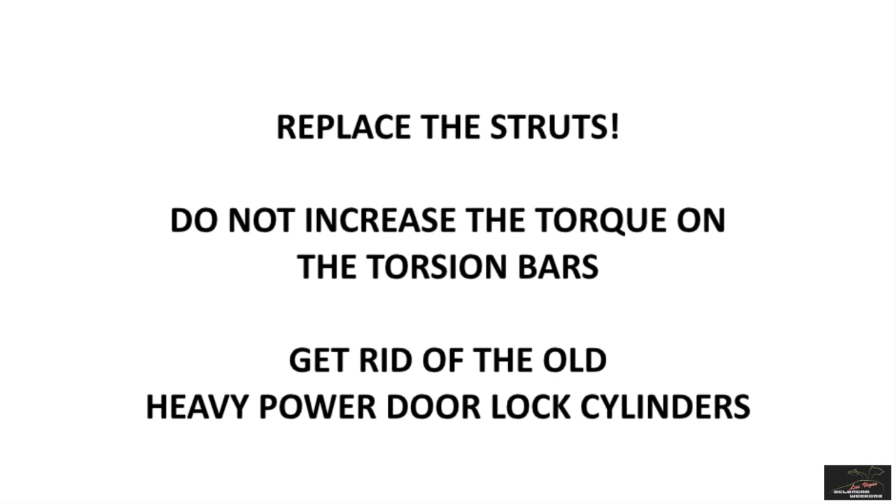And the number one recommendation I make to people is to get rid of those old heavy power door lock cylinders. They add a need for an extra 30 to 50 pounds of force on your torsion bars, and you don't need that. Your torsion bars, it's not an issue of if they're going to break, they will eventually break. It's just the fact of steel - they harden over time. If you want them to last longer, decrease the load on the torsion bars.

Other things that go wrong: lower A-arms on the DeLorean are open box. They're just stamped metal. Some people put an extra piece of metal to kind of box in that lower A-arm. It makes them stiffer and less likely to break. They obviously are failing because they now make new solid aluminum ones. You go over a pothole, particularly in the Midwest, the thing bends and it's junk at that point. They do make new solid lower A-arms out of aluminum for about $800 each. Kind of an interesting idea, but it still has the same problems of the geometry and relying on the front sway bar to triangulate. So it's a cheaper - I won't say cheap - replacement for a stamped steel part, because it's not cheap, but that's what exists if your lower A-arm gets bent.

So we recommend putting those new braces on. I think that can really help.

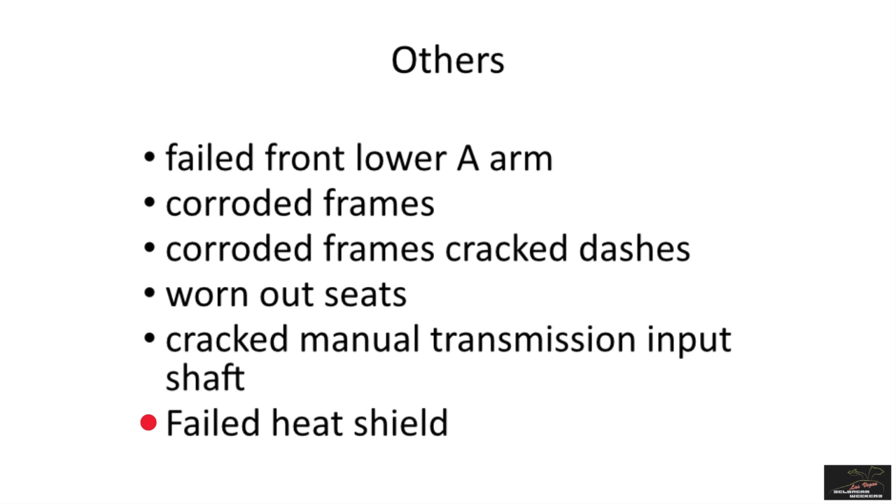Corroded frames, corroded cracked dashes - cracked dashes are a real problem. They make repro ones. There isn't any easy fix to that, and taking out a dash pad to replace it is not one of my favorite tasks. Worn out seats - they make repro seat covers, they're okay. Failed heat shields - very early on, the asbestos heat shields failed. Most of that's been taken care of.

This presentation was put together to help both existing and new DeLorean owners judge the condition of their car. It's also designed to help people who might be considering purchasing a DeLorean in the future to assess the condition of the car they're looking at. Look forward to more information about taking care of your DeLorean from DeLorean Weekend in the future. Thanks for watching.